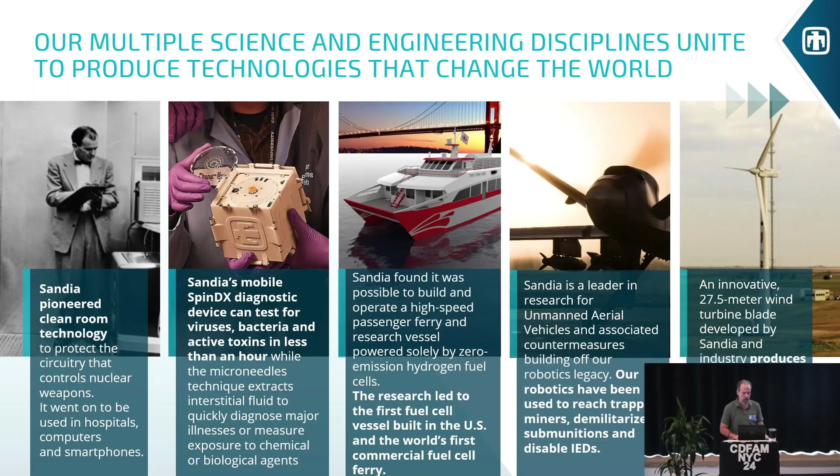In the manufacturing space, we pioneered clean room technology quite a long time ago, which enabled much of what we're talking about today. We have a long history in high-performance computing, both software and architecture, and large-scale, high-powered modeling and simulation activities that go all the way back to those early days around precision microelectronics fabrication. But in terms of other impacts in the manufacturing space, for advanced or additive manufacturing, Sandia has had 30-plus years of technology development and commercialization.

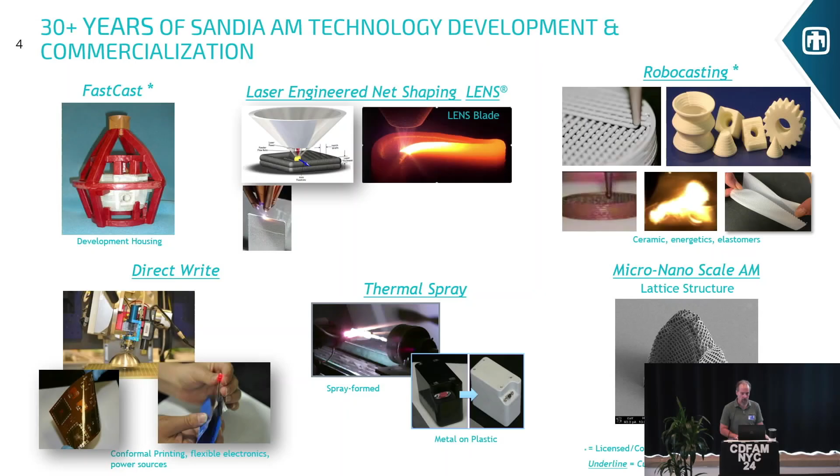So you've seen a lot of those represented today, from what we used to call robocasting. Nowadays, we call it direct ink write, so extrusion-based processes of soft materials like polymers, pastes, inks, whether they end up being fired and made hard like ceramics, or pads and cushions and encapsulants. Also LENS processes, laser engineered net shaping, and thermal spray processes, just to name a few. So Sandia has been involved in this space for quite a while and developed some seminal technologies in additive manufacturing.

More relevant to this talk is our activities in the computational space. Historically, we've developed a number of tools within the Advanced Simulation and Computing program, focused mainly on qualification activities, detailed, high-fidelity physics, high-performance calculations to understand the function of systems and components, as well as to qualify whether they will perform as intended. So that's kind of our history.

In more recent time, we've moved sort of to the left. On the far right are the qualification activities centered around our Sierra tool suite, which is a finite element tool suite that houses everything from thermal fluids analysis to solid mechanics and structural dynamics, aeromechanics, as well as a lot of underlying foundational computational technologies. That's been in the qualification space.

Moving all the way to the left, more recently, with the development of the Plato tool suite, we've moved into design optimization and orchestrating workflows around gradient-based optimization processes, topology optimization, shape optimization. And those are two of the things that I'll talk about today, Plato being open source, and other open source tools that we use as well.

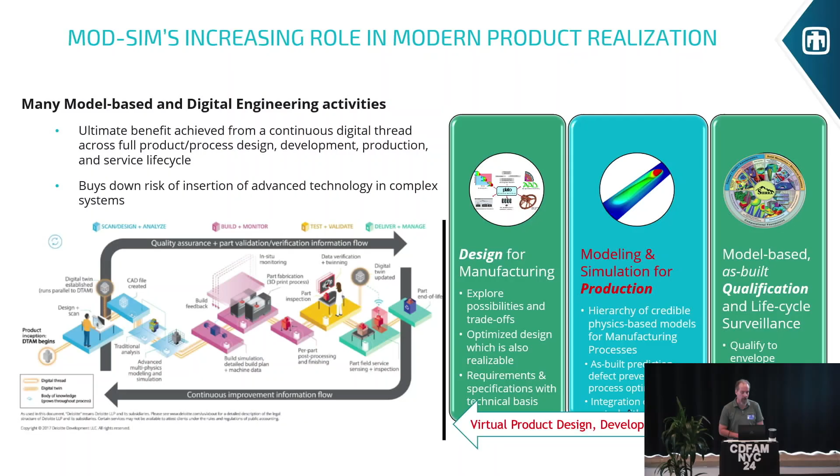But more recently, we're trying to integrate across the entire workflow to bring about a design to qualification centered around the actual production process, manufacturing activities, a full digital workflow of our integrated computational capabilities, and then trying to instantiate that, not a very good projection up here, in something like a product realization workflow.

Okay, so looking at the manufacturing activities that we have in the computational domain, a simple step through of how we might go from an idea to a product, we could lay out in a nice linear box diagram like this, just to highlight some of the activities and some of the tools. So there might be some idea for a part or some design that we might want to optimize. Maybe that's a topology optimization type process. But we're not necessarily limited to that.

In typical additive manufacturing, you're building the material at the same time you're building the part, and that has its challenges, especially when it comes to variability in the process and the uncertainties that brings into the actual material structure and the material properties and then the performance of that material.

One of the things we would like to do is sort of invert the current state of technology, which is you live with what you print. We would rather print what we want. So using the fact that we're making the microstructure at the same time we're making the part, can we tailor that microstructure in some way that enhances the function or optimizes the performance in particular regions of interest?

Then we might want to take that design, which is pushed both topology optimized, let's say, in an ideal world at the part scale, all the way down to microstructure, and make it process aware. So actually, now that we have a part, simulate the manufacturing process and optimize that process to minimize maybe residual stresses or distortions subject to some engineering requirements.

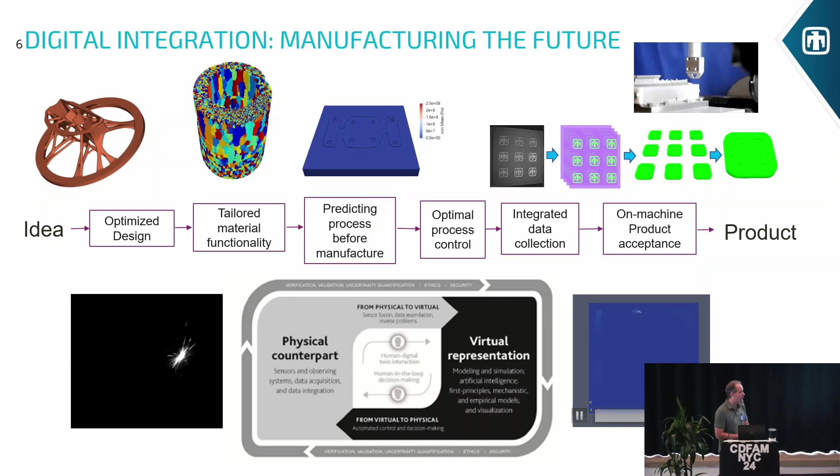So really at the core of what we're trying to get at when we integrate these computational tools is a level to design both at the part and microstructure scale that's process aware and then integrated digitally with all of the information that we can extract from the actual process as the part is being manufactured. So with that as a backdrop, I'll talk a little bit about some of the computational tools that we use at different phases of these workflows.

So the first one I mentioned was Plato. Plato is really a tool suite for integration and orchestration of optimization-based analyses, particularly shape and topology optimization. Plato, at its core, has its own physics analysis engine which is highly optimized and built around automatic differentiation, which exposes those gradients and derivatives of key properties for gradient-based optimization and orchestrates all those workflows.

In addition, Plato can also interface with our favorite finite element analysis tools, which we've spent a long time developing and making very robust and very performant in terms of the high-performance computing architectures, as well as validated material models, our Sierra tool suite. So Plato is able to integrate with all of these and sort of orchestrate these workflows for some key bread and butter activities. One of those, as I already mentioned, centered around topology optimization and shape optimization, but there's a lot of other research activities going on in this space around this tool suite.

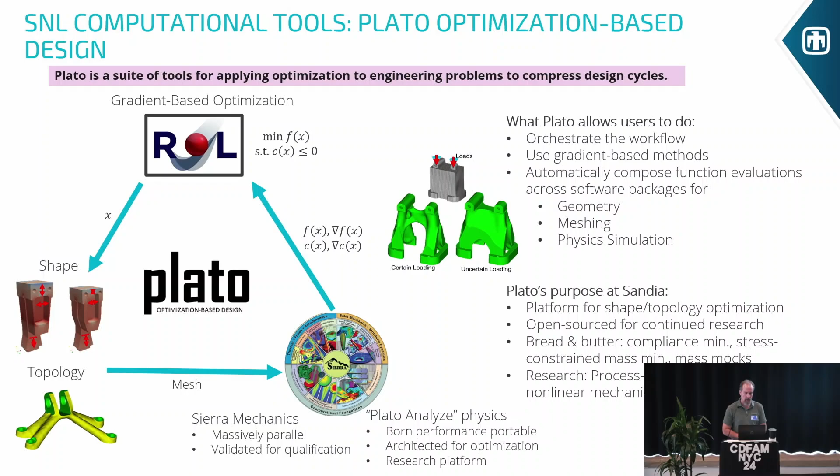And I'll go into those a little bit, but one of the items that I want to point out is optimization under uncertainty. So if you have very well-known and well-described loadings, you might take a structure such as what's shown in the center here and optimize to a very nice, neat, almost elegant geometry. But if there's any uncertainty around those loadings, you might need to build in some robustness. And so some of the research activities in the past have centered around optimization under uncertainty using Plato.

More recently, however, there have been a couple activities I mentioned already, the process-aware design for AM. So the movie down there in the lower left is optimization of the stiffness of this part. At the same time, you're trying to minimize the residual stress as it's being built up in a laser powder bed metal AM process. So controlling the heat and the stresses that build up in the layer as you're at the same time optimizing for the stiffness of that part. So this is one example of bringing these computational tools and multi-objective optimization to a process-aware situation for metal AM activities.

Another optimization example here is around cellular design. So if you have a lattice structure, and this is where 3MF comes into play. So topology optimized design, it's based on a homogenization approach, but there's a way of mapping carefully between the homogenized continuum method that's being used to do, again, a multi-objective optimization here. Shear forces and thermal gradients on this double-ringed sort of structure, which is printed actually and over on the table if you want to take a look at it. So multi-objective optimization for this lattice structure.

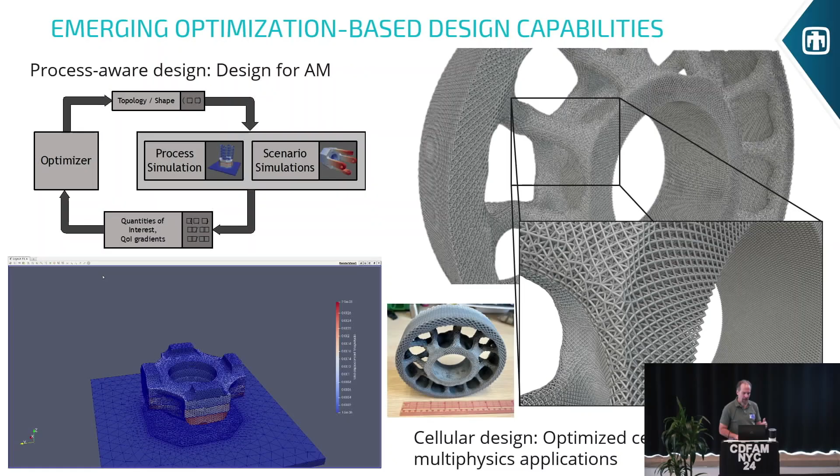Ti64, I believe, is what the metal one sitting over there is, pretty seamlessly. So powerful tools for lattice structures and process-aware optimization.

Other emergent activities in this space really have to do with nonlinear mechanics and non-equilibrium mechanics. So if you want to optimize these foam or lattice-like structures for soft materials, you want to optimize energy minimization or stiffness or these snap-through sort of geometries, which are kind of neat and cute for various applications.

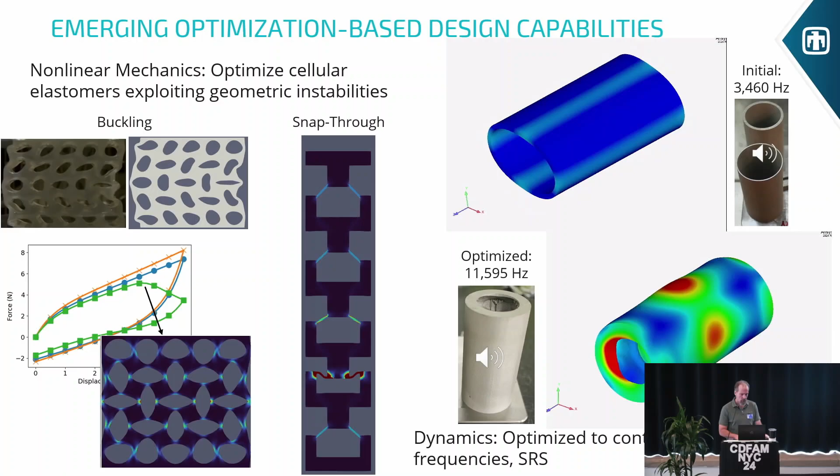Again, the tools that are being developed in the Plato suite, or again, dynamics, if you're interested in the modal response of parts and you want to optimize those modal responses for structural behaviors. Again, these nonlinear capabilities and solvers that are being built into Plato are handy for that. Again, open source package. Okay.

So moving on from Plato, going back to Sierra. So Sierra, as I said, is a finite element package that handles a lot of the thermal fluids capability, as well as structural mechanics, structural dynamics, very robust, highly performant. And we're developing very detailed melt pool models and validating those models against physically realizable processes and materials.

And then upscaling, quantifying uncertainty in the predictions of those models based on machine uncertainty for, pick your favorite metal AM machine, and understand what the variabilities of the laser scan speed and power and all those fun things are, and propagate uncertainty all the way through the full physics weld pool and understand what is the variability, and do your simulations fall within or bound the experimental variability that you might expect.

So coupling these full physics models with full verification and validation and uncertainty quantification, so that we can then scale up to laser scan strategy and optimization procedures to do more detailed and more rigorous residual stress and distortion compensation activities, as well as predictions for microstructure and the design of scan strategies to get specific types of microstructure in specific locations.

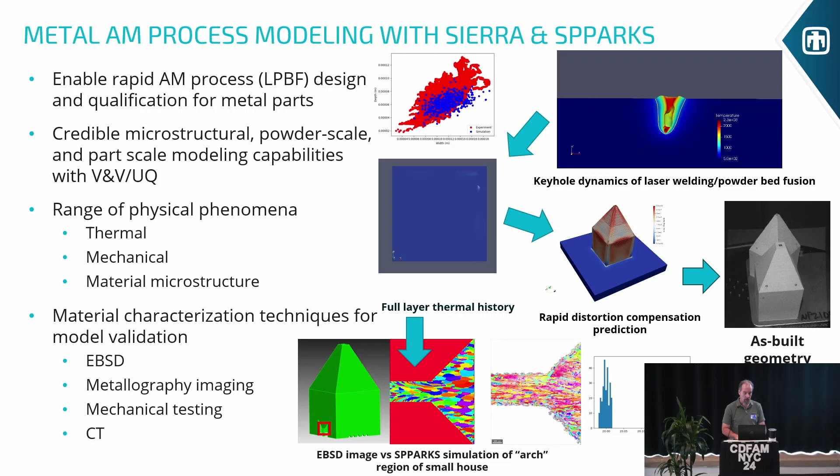We're developing computational workflows based on our tools, both meshing and geometry representation, and our finite element analysis tools to automate that, to explore virtually what are the different lattice structures, build up the library from a computational perspective, and then export those directly to the printer, and optimize that sort of design loop on the virtual side before we actually go and print.

We're also developing the computational tools to model the printing process itself for, again, defect detection, in situ process monitoring, and production optimization as well.

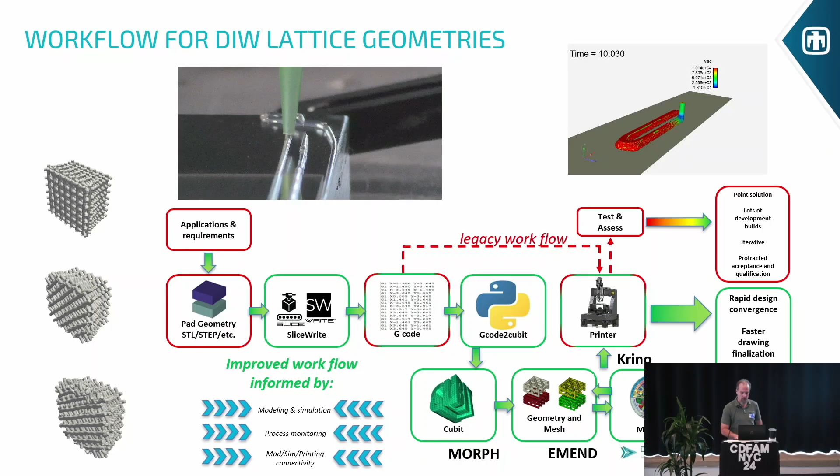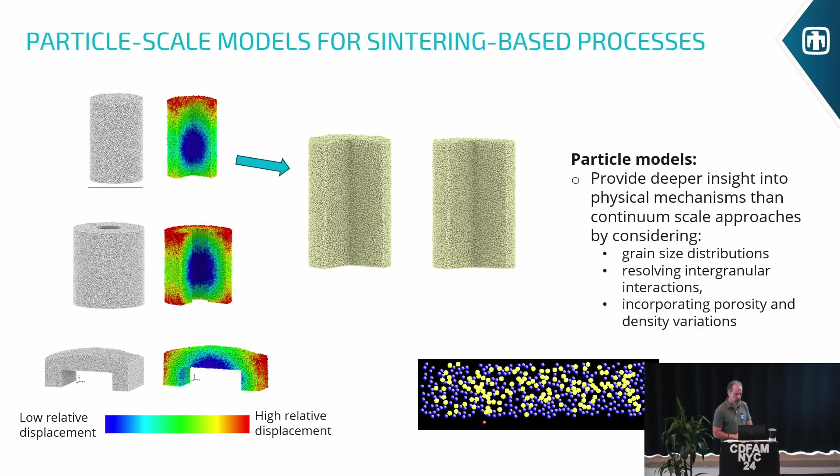We really want to understand how the part is shrinking, and how the burnout process happens at the powder scale, to be able to predict that and control that using our open source molecular dynamics code, which has a granular powder modeling package, LAMMPS, to be able to develop these tools for these types of processes.

Finally, what we'd like to do, as I said, is take all this capability in terms of validated and verified, uncertainty quantified, part scale, process scale, microstructural scale, in situ diagnostics and monitoring, and bring that all together into a framework that allows us perhaps a generative design kind of approach, or at a minimum some in situ process monitoring, defect detection, and perhaps feed forward control and automation of the processes themselves.

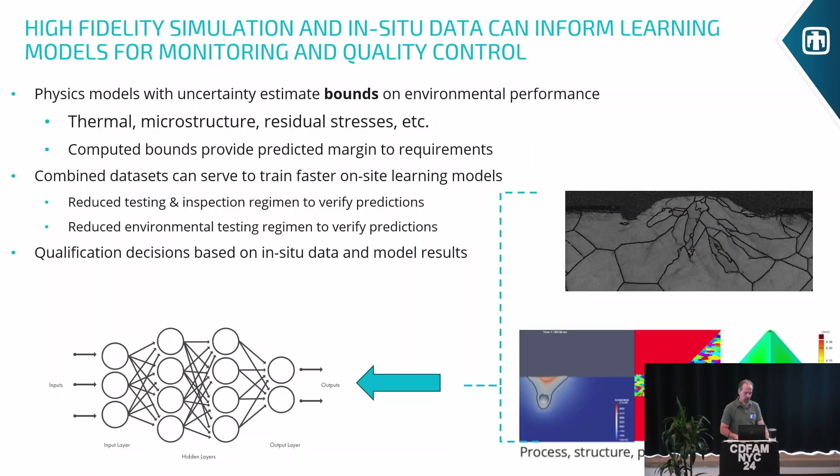So for us, generating tons of this data and operating on this data within the high-performance computing activities at Sandia is something we are very keen on doing and have the capabilities to do. So in the end, hopefully you got a taste for some of the physics-based modeling and simulation tools that we're advancing, and these credible simulation approaches.

We're integrating them at part design and process optimization scales for CDFAM. They're multi-scale, from meso to microstructure. Also, the validation and verification of these capabilities is robust, and the uncertainty quantification and uncertainty propagation through the coupling of these different methods is something that we have expertise in.

Going forward, ultimately, what we'd like to do is develop approaches for digital integration of these mod-sim workflows with the in-situ data collection activities. And this is something that we'd like to do for the ability to have on-machine inspection and born qualified parts, and ultimately to accelerate our product delivery time cycles.